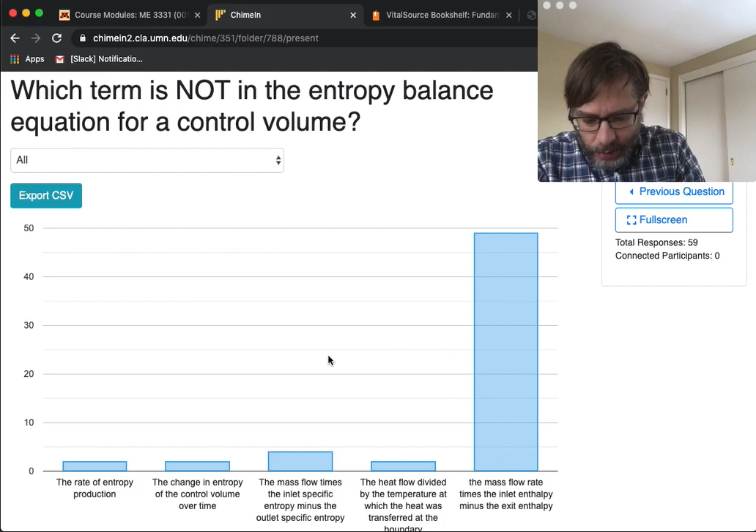Okay, all right, let's continue on to what we're doing today. Today I'm going to cover a lot of slides because a lot of the stuff we've kind of already done before, and it's not adding very much to the material.

But it'll be good review. Some of it will be a review of what we've done and how to solve problems, and some of it will be kind of not even necessary for us to go through. For your exam at least, it'll be useful for future reference.

So the property data. So last time we did stuff like that. We did the control volume, the entropy rate balance for control volume. That's as far as we're going to go for the exam. But if we wanted to calculate entropy change a little bit more in different ways, the property data that we have in the tables can yield relationships among properties that are established using what are called the TDS relations.

Now, I'm not deriving the TDS relations. I may do that in a separate lecture or something, but the TDS relations are actually quite important. They're a combination of the entropy balance and the first law balance, okay? It's like if you take the first law energy balance, that's where you get the dU and the dH here, and you put it together with the PdV term, which is like a work term, you put it together with the entropy balance, which is where the TDS comes from, you end up getting this equation.

Now these are pretty useful sometimes for solving problems. We may go through some more problems like this on Friday using the TDS relations. So I wouldn't worry about it right now, but definitely something you want to consider.

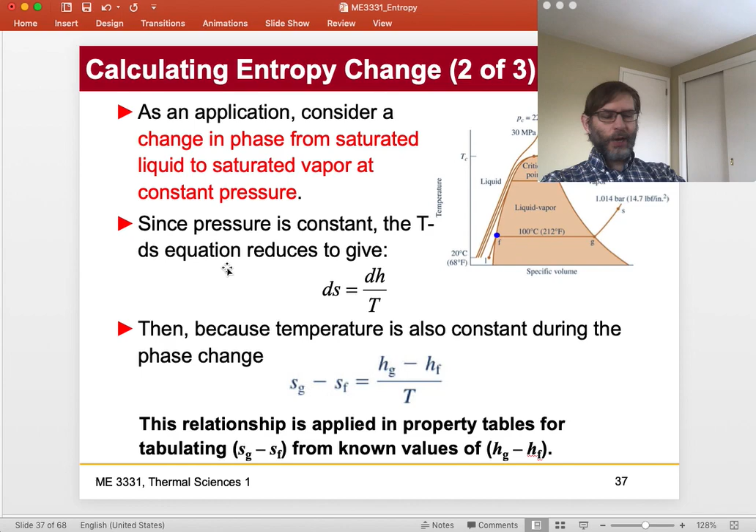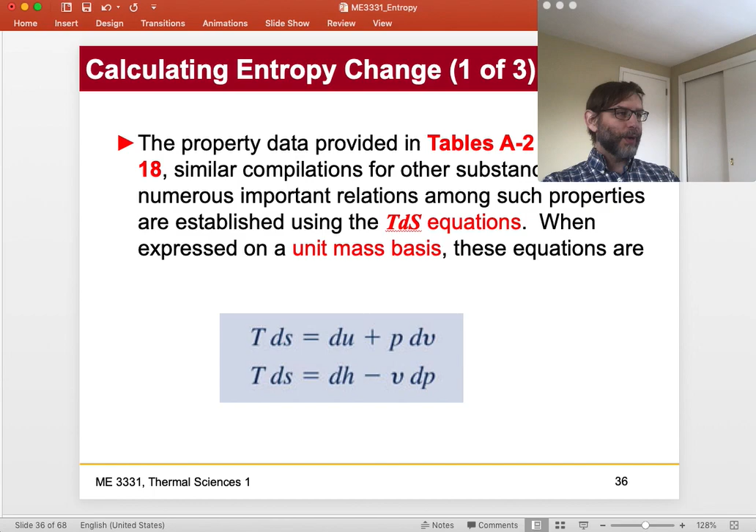So remember I said that thermodynamics is only really, excuse me, two equations. Well, the TDS equations are like taking those two equations and putting them together. Okay, that's what you're doing. It's nothing new really, it's just kind of mixing and matching those things.

Okay, so here's an example where they do this, and I'm not going to belabor this, but consider water vapor at 100 degrees C. So a lot of these slides come from the textbook, so I use them because I think they're useful and they line up really well with the book. But I don't know, sometimes I don't know exactly what's going on here.

But in this case, you can calculate the change in entropy across the vapor dome from the saturated liquid to the saturated vapor using the TDS equation. So here you go, you can find SG minus SF using the HFG value from the table, or you can just look at it in the table.

So that's why this is like silly, because you can just look at the table and find SFG. Why would you calculate it and risk calculator error? I would always look it up.

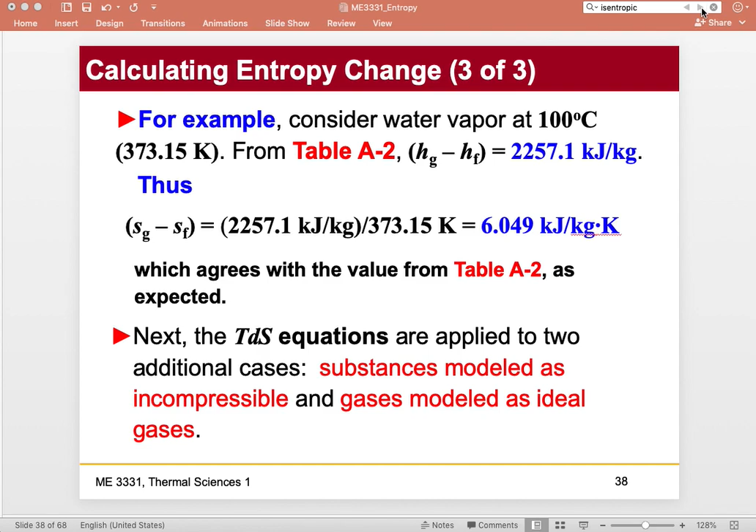All right, so let's go here. The other thing that we have to do is consider entropy change for an incompressible substance. Incompressible substances are things like liquid water, right? It doesn't compress. Gases compress, so gases are a compressible substance.

So the incompressible substance model assumes the specific volume is constant and the specific internal energy depends on temperature, U equals U of T, just like it does for an ideal gas. Thus, dU equals C as a function of T dt, where C denotes the specific heat. Right, so we use specific heat for liquids as well, as you recall.

With these relations, the TDS gives us something like the following. ds equals C dT over T, and here S2 minus S1 equals C, the natural log of T2 over T1, in which case you don't have any pressure term. Incompressible means that it's independent of pressure.

So you can see that for a liquid or an incompressible substance, the entropy change, or the entropy, is only a function of temperature. Only for liquids, not for gases, okay? I know, confusing, I know.

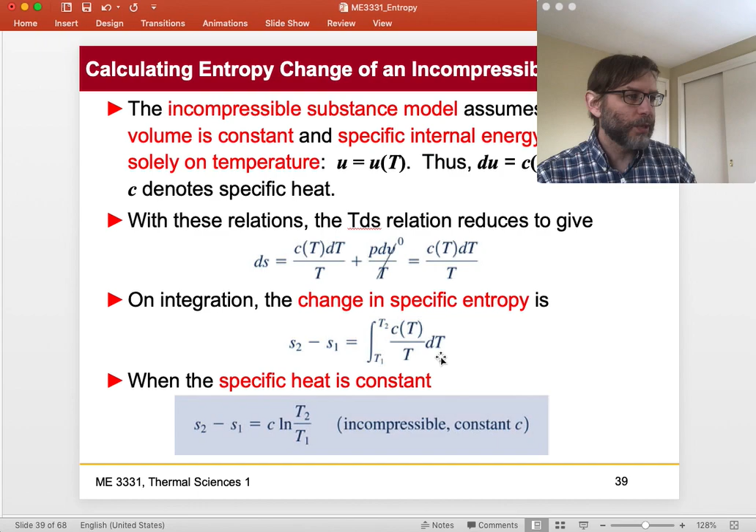But because the pressure drops out, you don't have a PdV term, you don't have any compressibility, you end up losing the dV term in the TDS equation, and you end up getting S2 minus S1 equals the specific heat times the natural log of T2 over T1. So, as I say, you look it up in the table.

So here's where we got our pressure correction term. You know how we did this S naught thing? The TDS equations are what gave us that pressure correction term. Remember the pressure correction term we've been dealing with and talking about for ideal gas? Well, it happens to come from the TDS equation.

So if you assume ideal gas with constant specific heats, you have CV as a function of temperature. Actually, not constant specific heats in this case — they're integrating, so they're assuming CV is still varying with temperature. You get the following relations. We've been using the one on the bottom right.

This S of T minus S of T, T and P is equal to the change here. This is the Q over T term, and this right here is what we call the pressure correction term. So the pressure correction term is something we have been using.

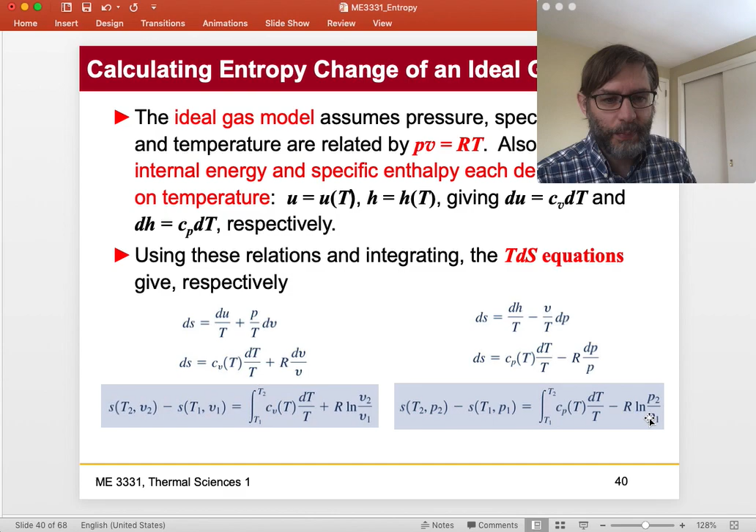Now, if I get down to this, we know, and I've already told you, that this S naught as a function of T has been already tabulated. So now, if you look at the slide, you know where S naught of T actually comes from.

S naught of T comes from the change from temperature to some reference temperature, from Cp over T dt, where T is some arbitrary reference temperature, usually taken as 0. So now you know where this comes from, right?

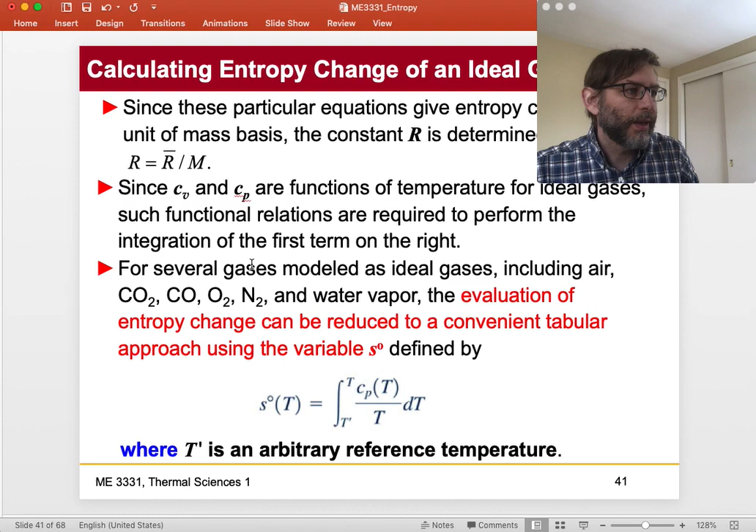So this S naught of T is actually some sort of reference temperature value, or S naught of T is this value that you can look up as a function of temperature, which you can use then in the TDS equation to get what you need.

And so there is our relation that we've been using, this one right here. Essentially, we know that the change in entropy is equal to S naught of T minus S naught of T at the other temperature, minus R natural log of P2 over P1. So that's the equation we've been using already for an ideal gas.

That's why I say it's a little bit of review. And here, we've already done this in homework too, where we use the molar specific version of this, where S bar, delta S bar, essentially, we use S bar naught. And you can see in the tables, you can find these values for different gases, A22, A23, A24, etc.

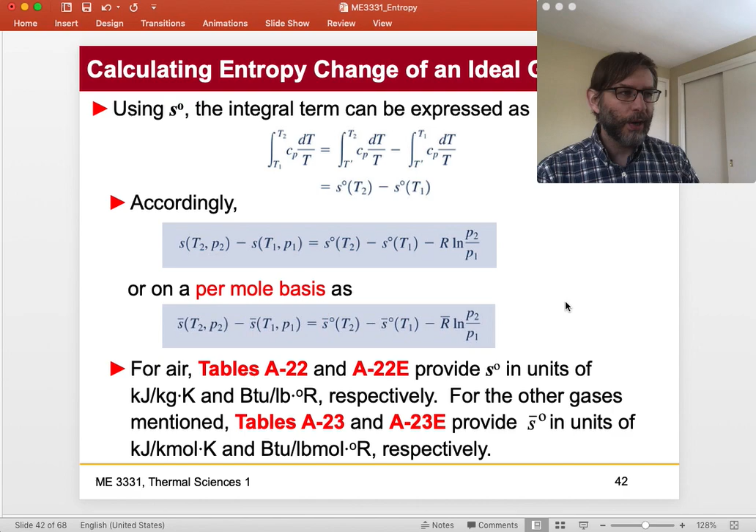Okay, so this is where you're finding these change in entropy values that we've been calculating, and now you know where it comes from — it comes from the TDS equations. So the TDS equations are kind of important. We use them, but we don't really think about them very much. We just sort of use them for finding things.

The change in... we've already done something like this, so you can look at this yourself. Essentially, we get S naught 1 and S naught 2 from the tables, which we've done before, and calculate this. So you can go through these yourself and do some practice problems. I suggest that before the exam.

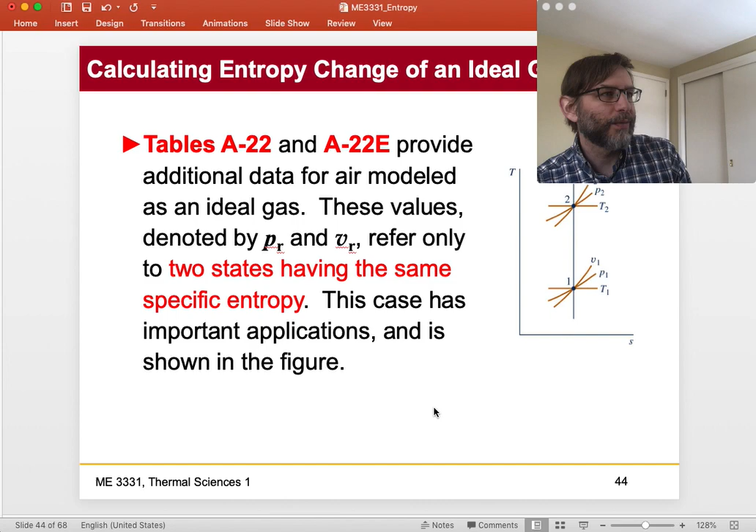Okay, so let's think. Calculating entropy change of an ideal gas, tables A22. These are reference pressure and volume. All right, we're skipping this one, we're skipping 44. I'm just going to note here that we're skipping these because we don't need to pay attention to that right now.

The other thing we can do is if we have constant specific heats, we can pull the specific heat value out of the TDS equations, out of the integral, like they're doing here and here. You're pulling them out of the integral, and essentially now for an ideal gas with constant specific heats, you've got a very simple equation to solve: Cv ln T2 over T1 plus R ln V2 over V1, or the other way around.

Okay, here's something that's just really important to know. These two equations can be used interchangeably. There's not a specific situation when you need to use one or the other. They're equivalent to each other. You just have to know which thing you have in your problem in order to solve.

For example, if you have a problem that has changing volume, you'd use the left one. If you have a problem that has changing pressure, you'd use the right one. And so this is the most important thing. In this case, the one on the left, the Cv one, this would be if you have like a piston cylinder thing, you have V2 over V1. And the right one would be, say, if you had a constant pressure process, you'd have the changing pressure. But it doesn't matter, you can use them interchangeably.

They don't apply to specific things, they're based on thermodynamic properties. The only thing you need to make sure you understand is that these equations are only to be used for ideal gases with constant specific heat. Don't start using these for steam, I'm gonna freak out, so don't do that. These are for ideal gases assuming constant specific heat.

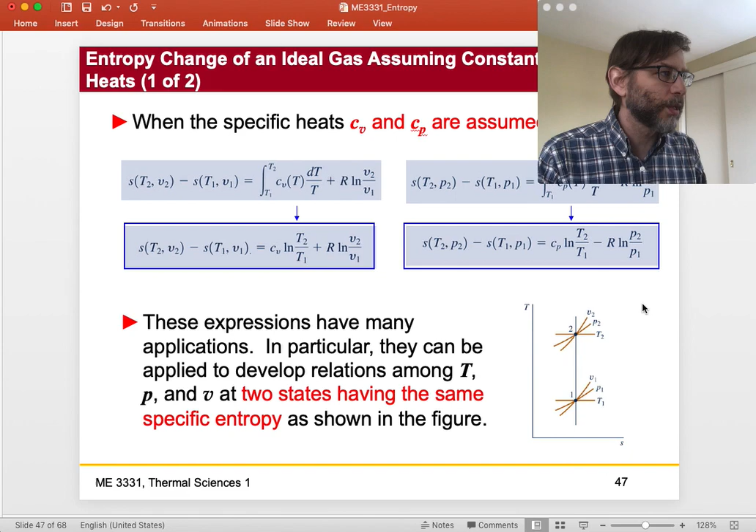Okay, so there's some helpful relations that you could use. Now if we go here, we can derive a couple of really important relations, and I'm going to use these in an example for us. And they go kind of like this, so let me move here.

So in the case of what we call an isentropic process... change in ideal gas assuming constant specific heat. I'm modifying the slides right now, I'll repost these. An isentropic process has S1 equals S2, and it has adiabatic, Q equals 0. Right, adiabatic. Okay, that's the definition of an isentropic process. Let's just do that like that, okay?

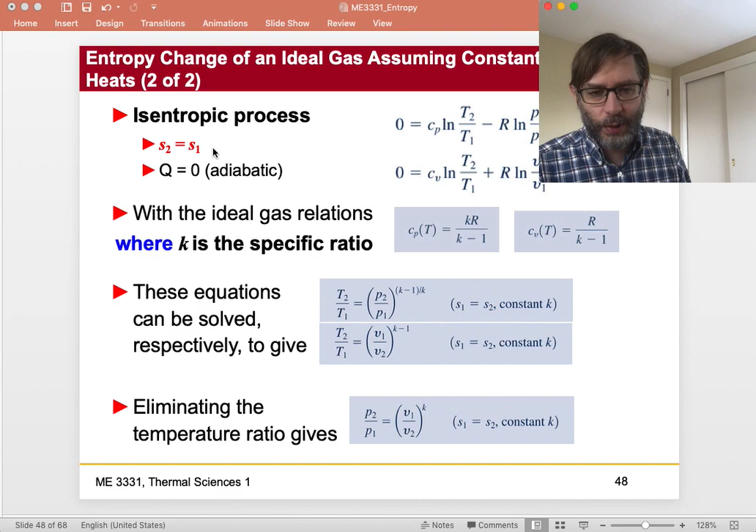Good, isentropic process defined. All right, so now we've talked about this before. We've talked about adiabatic before, that's where Q equals 0 for a process. For a process where S2 equals S1, that's called a reversible process. It's one where S2 equals S1 and the sigma is 0, and there's no heat transfer. That means that term of the equation goes away, and then what you're ending up with are the TDS equations that look like these.

0 equals... and for constant specific heats, if we want to assume that, for an ideal gas, we have the same relations I just discussed earlier. And then you can use these relations, Cp as a function of T equals kR over k minus 1. When they do this, by the way, this doesn't mean Cp times T, this means Cp at that temperature, okay, be careful, that's not Cp times T. So it's kR over k minus 1, which I've given you these relations before: Cv equals R over k minus 1, and Cp equals kR over k minus 1. These are relations we should have learned in Chapter 3, but I did a bad job and kind of forgot to go through all those, so I did a little bit of interspersed talking about these and how they're derived.

Assume these are for an ideal gas at constant temperature or constant specific heat. If you combine these sets of equations, you can get new equations. You can see how this was working out. Essentially, you take the exponent to each side and relate these R's and K's.

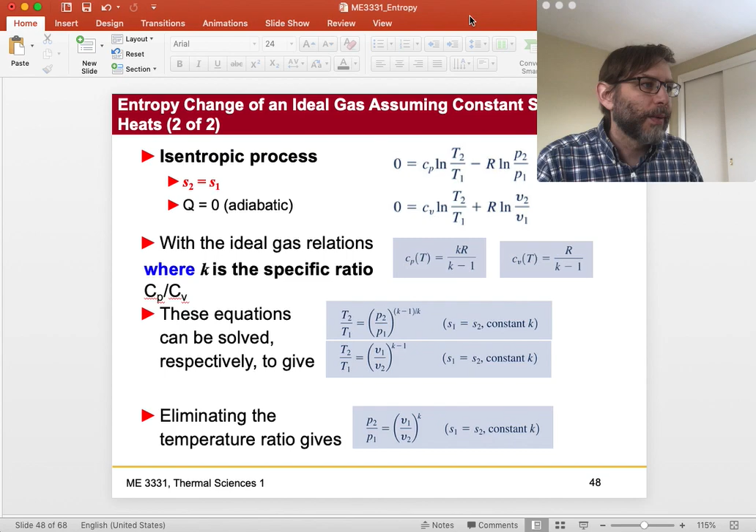Remember, K is the ratio of specific heats, where K equals Cp over Cv. Do you remember this? We talked a little bit about the same kinds of equations we use for a polytropic process, but now we're using them for an isentropic process.

It turns out they are the same equations, just replacing k for n and k. When you solve these isentropic relations, k is the specific ratio, Cp over Cv, and the equations, when solved, give these, which are called the isentropic relations. So T2 over T1 equals P2 over P1 to the k minus 1 over k. These are hugely important and very easy to use equations for the case where we have ideal gas, constant specific heat, and reversible process. You can use them for an isentropic throttling process, a compression and expansion process, the turbine, compressor, all sorts of things.

If we assume isentropic and we assume constant specific heat and ideal gas, that's a lot of assumptions, but we often make those kinds of assumptions when doing problems. So you can get this set of relations which are actually really useful.

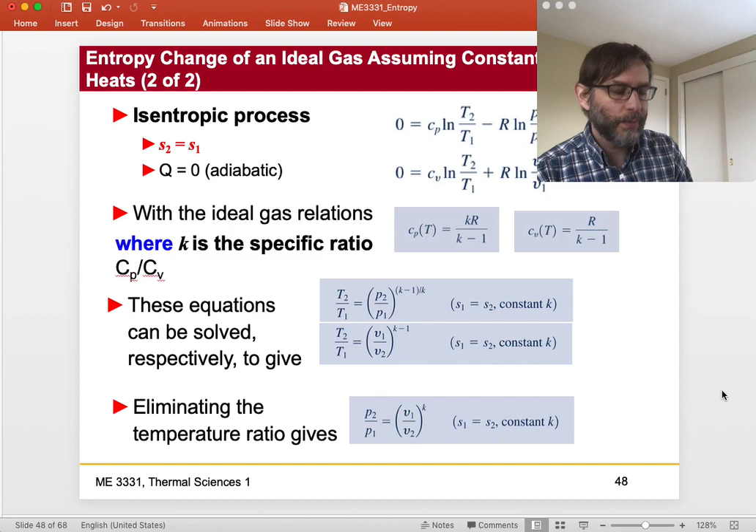Oh, this is using the PR. I'm not going to do this. But I am going to do this, so you can look through this example.

This example essentially tells you to calculate the final temperature using two different methods: one using the tables, where you can use the PR method, which I just didn't go over, or you can use the constant specific heat value. In this case, you can calculate the temperature T2 using this relation here between those two states. If you look it up directly in the table, you get the change in temperature as a function of changing specific heats, whereas the second method does not assume changing.

So this one's T2, the more accurate method, is 339.7, and this one's T2 is 345.5. That's really not going to make a big difference, but certainly maybe one would be more accurate than the other. I don't really care. I kind of think constant specific heats is a fine assumption, and in combustion we do it all the time. So it's kind of neither here nor there.

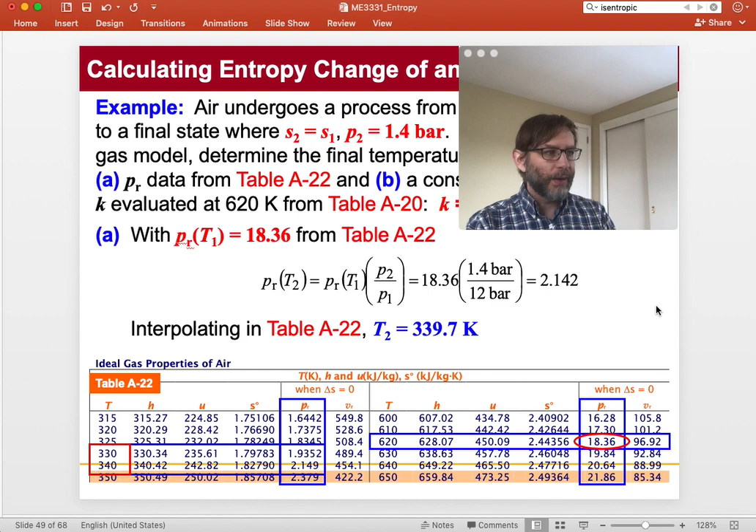I think probably the method using the tables, which I haven't really told you about here, is more accurate. But most of the time we're going to assume constant specific heats. Okay, so let's do a couple problems. I'm going to use the ideal gas model with constant specific heats to solve one of them, and the other one is actually a steam problem.

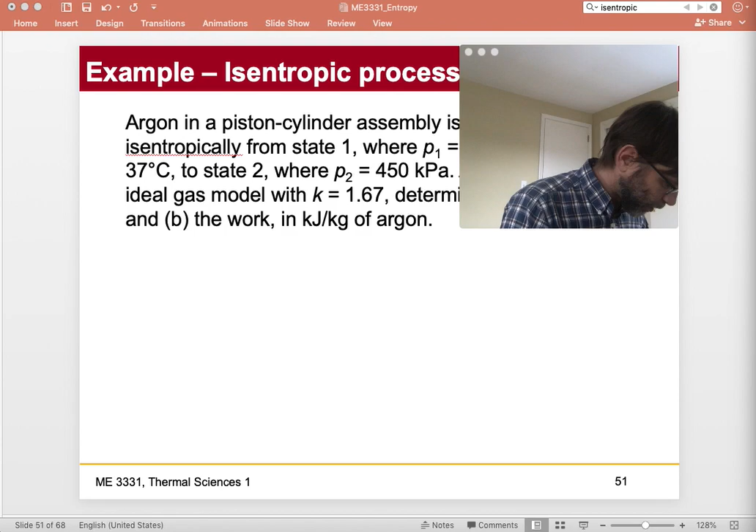Let's see, which one am I going to do first? I'm going to do the argon one first. The first one we're going to do is argon in an isentropic process. So let me get my tablet out here and do some work.

Okay, here we go. Example problem 1: we have argon in a piston cylinder assembly compressed isentropically from state 1 to state 2. State 1 and state 2 are given here, and K is given.

When a problem says K equals something, that means they're assuming constant specific heats. So that's a constant K, constant specific heats, because K is equal to the ratio of specific heats. All right, so what we're going to do is solve this thing.

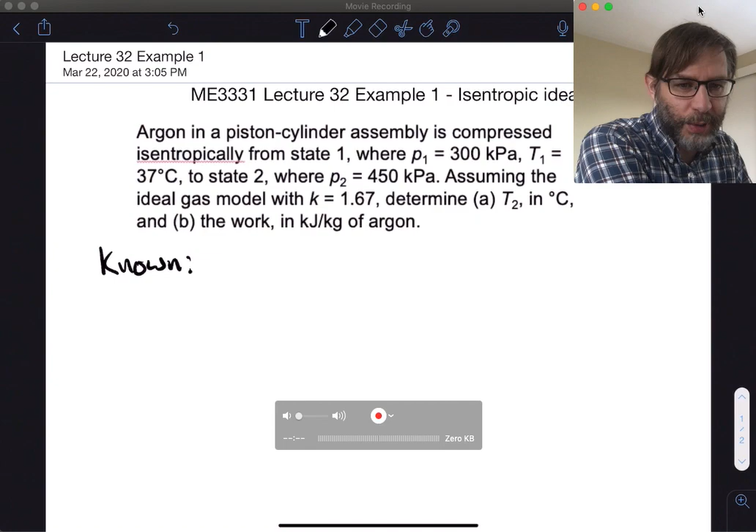Known. By the way, I want you to use these methods that we've been doing with these example problems over and over again for your exam. I want to see this procedure laid out. I know people think it's annoying and obvious and all this stuff, but just humor me. Put them in there, and you'll get all the points, and then I'll be happy.

Okay, so known: we have a piston cylinder. So we're back to pistons and cylinders again. Compression with an ideal gas.

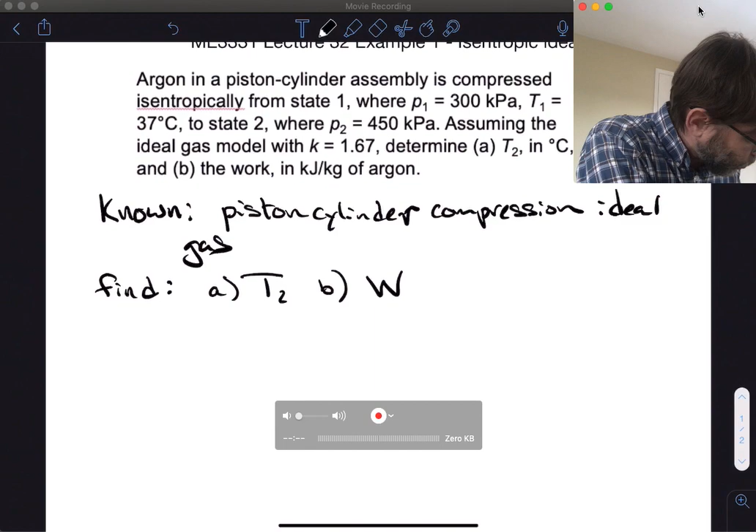What we're going to find here is... hopefully you can read that. Oh, you can read that, right? I hope my handwriting isn't totally degrading here. So find A, we're going to find T2, the second temperature, and B, we're going to find the work in kilojoules - little w in kilojoules per kilogram of argon.

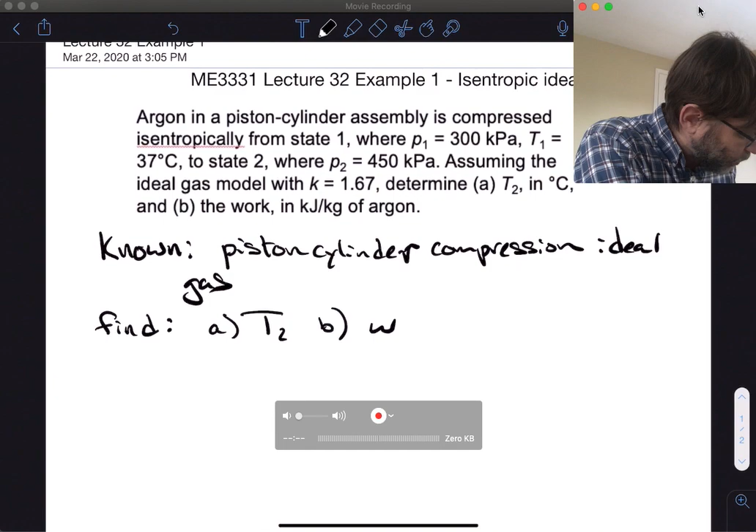Ideal gas, which is argon. So we don't need to know much to solve this, but let's just make some assumptions, and the assumptions will make this thing very easy to solve. Essentially, we have argon so it's a closed system, which we'll draw here in a minute. Second, we're going to assume this is an isentropic process.

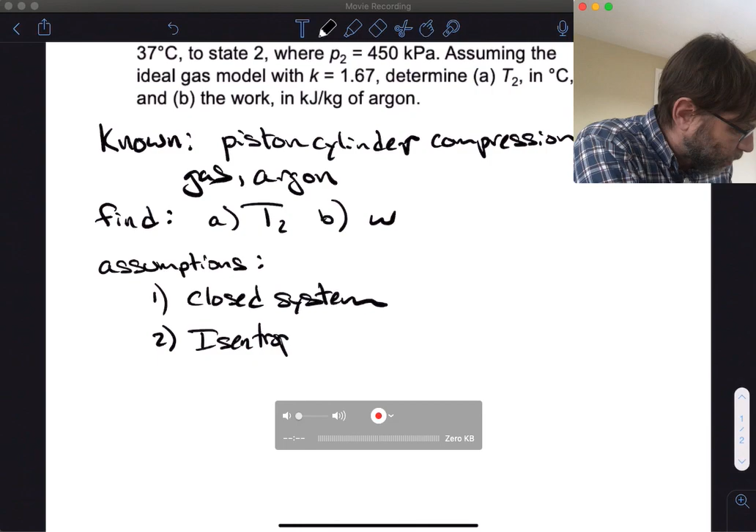It doesn't really say that, does it? Isentropically, of course it does.

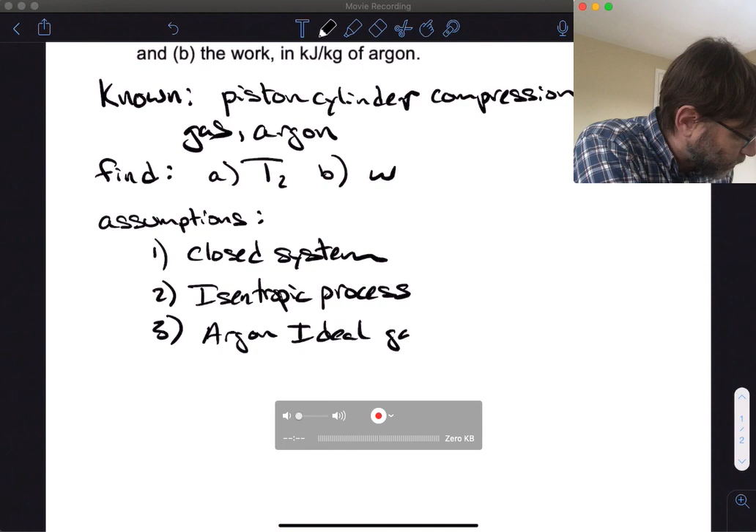Okay, number 3: argon is an ideal gas with K equals 1.67. It's interesting, argon. It reminds me of something a colleague at University of California, Berkeley is doing with argon in an engine.

Remind me when I get to the engine cycles. Well, hopefully you can remind me, but I'll try to remind myself that when we get to the engine cycles, I'm going to discuss the idea of using argon as a working fluid in an engine, okay? Let me just make a mental note there. Right now I'm not going to do that, I'm just going to get this problem done.

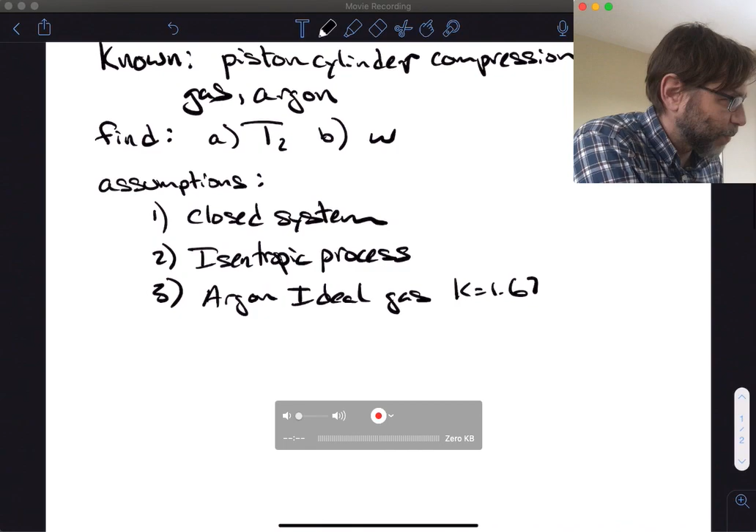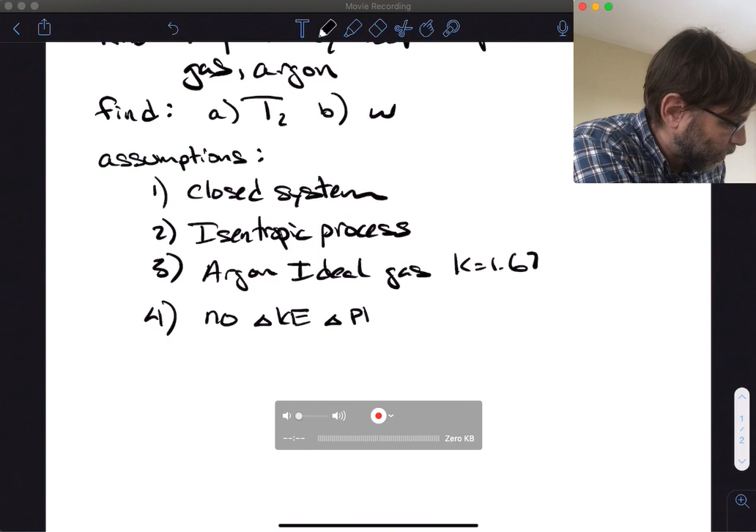4, we're going to assume no delta KE and no delta PE. So we assume no kinetic or potential energy effects. And now let's make our diagram.

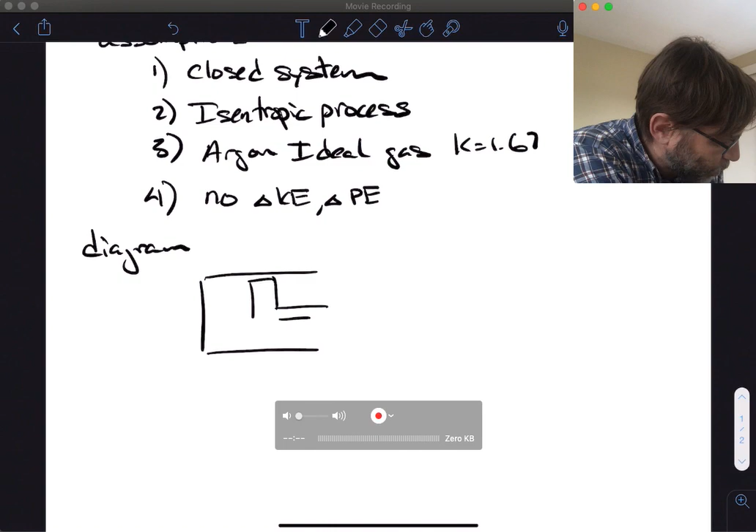So our diagram looks like the following. We always have to make our diagram. You can be pretty much rest assured that there's going to be some kind of piston cylinder type deal on the exam, because I do so many of them that it would be silly for me not to put something like that on the exam. It might be a little trickier than what you've been seeing, but it's going to be a piston cylinder.

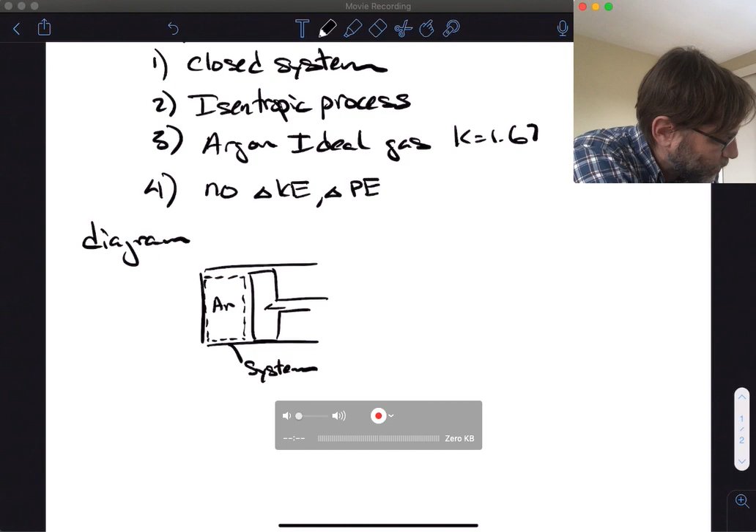So this is the system, which we've labeled with our dotted line. We know you have argon in here, you have a piston, and it's a compression process. So we have work - they want us to find little w, so I'll put that in there. We're going to say it's insulated, so I put insulation around the outside of it. So there's no Q.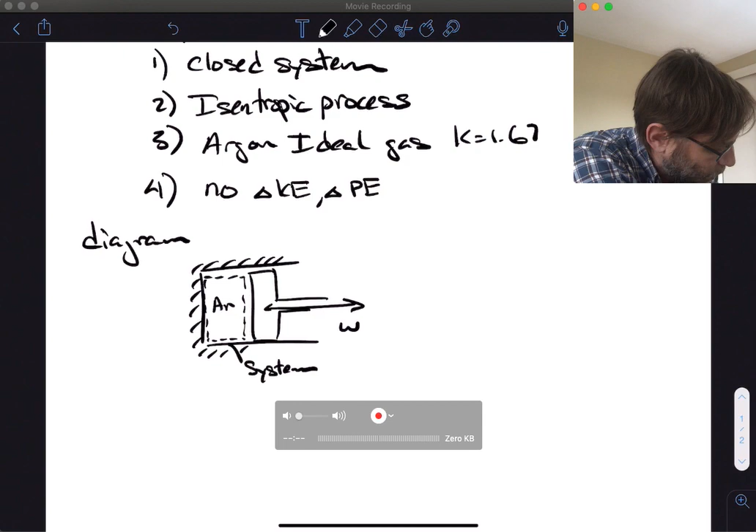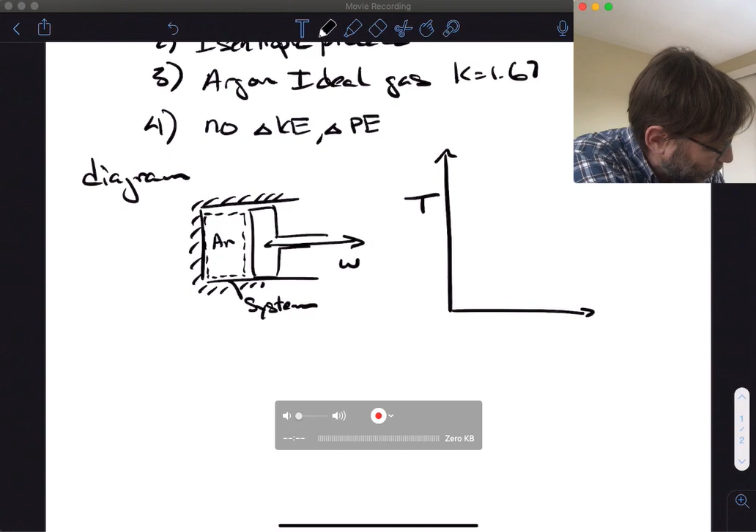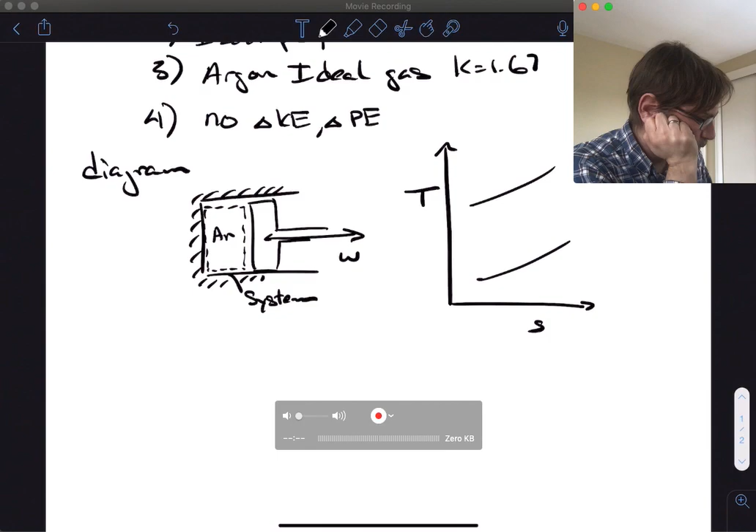And then we also have, in this case, we can make a TS diagram because we know what everything is. So P1 equals 300 and P2 equals 450. So 450 is up here, and 300 is down here. So this is 450, this is 300 kPa.

And you have an isentropic process, which means that S2 equals S1, isentropic - remember we said that? So this is straight up. So we're compressing to a higher pressure, so we're going like this. So this is state 1 and state 2.

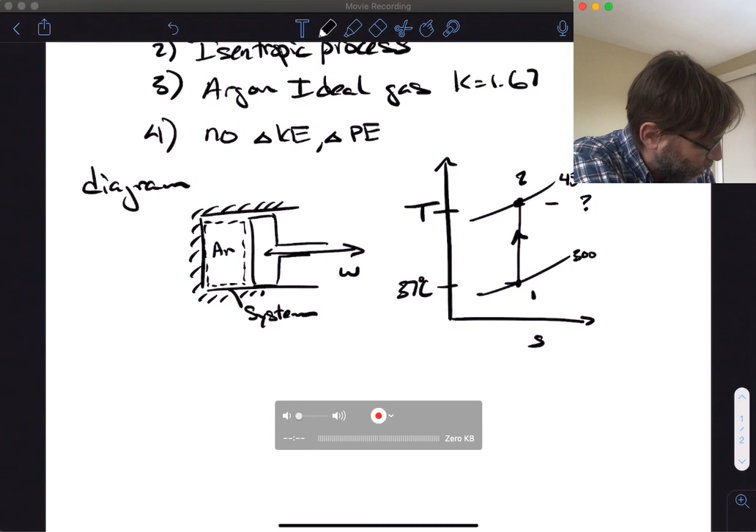Okay, anything else? We don't know T2, so we don't know this one. But we do know this one is 37 degrees C. So T2 is not known - that's what we're going to find. Oh, but it's so easy, right?

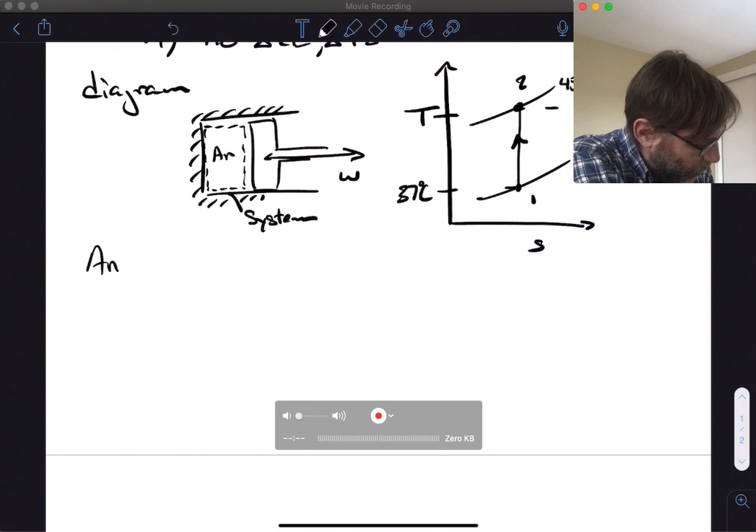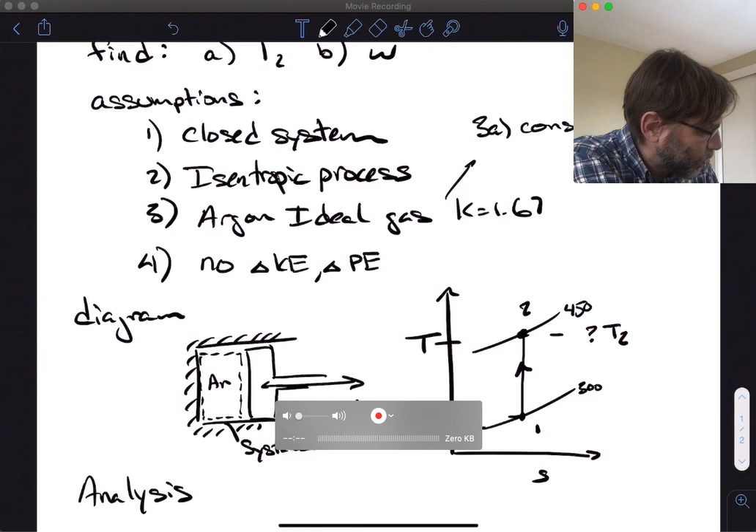So with those relations we just came up with, since we have constant specific heats with constant ideal gas, this assumes - we'll just call it 3A - that it's constant specific heat, constant CV. Because they give us a K, we assume automatically that it's constant CV.

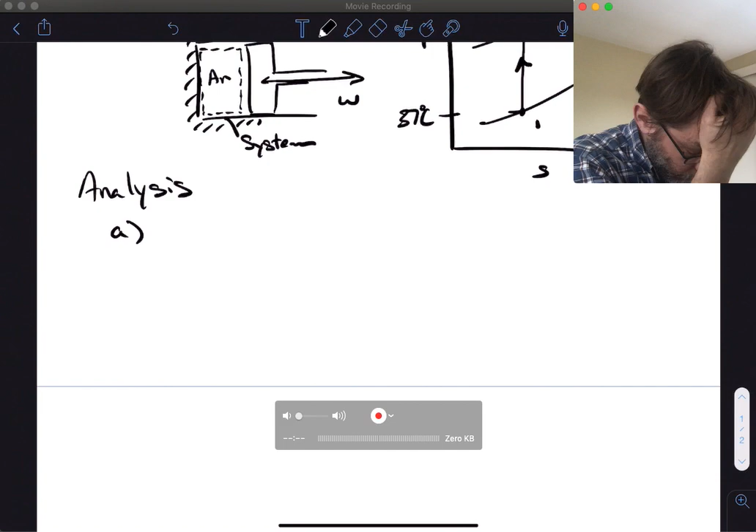Okay, so now let's go. A is to find the temperature. We're going to use our new relations that we just came up with, which are called the isentropic equations. So we're going to use T2 over T1 is equal to P2 over P1 to the K minus 1 over K. How easy is that?

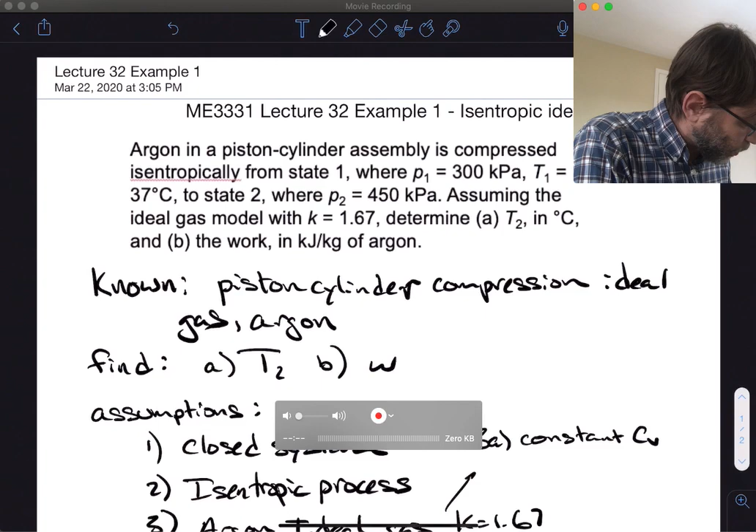So T2 then is equal to T1, which is 310K, times 450 over... is it 150? What's going on here? It's 300. I said 300. P1 is 300, and T2... okay, so my solutions are different - 300 or 450.

Oh man, so I'm gonna have to check the solution here. Bear with me. So k minus 1 over k is 0.67 over 1.67.

All right, let me get my handy phone out. I got a new phone, but the calculator is still just as bad as the other one. Let's see, calculator - oh, does it let me do scientific? Oh yes, okay good. So 450 divided by 300 equals, to the... where is it here? X to the y. You can't see what I'm doing here, unfortunately. I'm sorry.

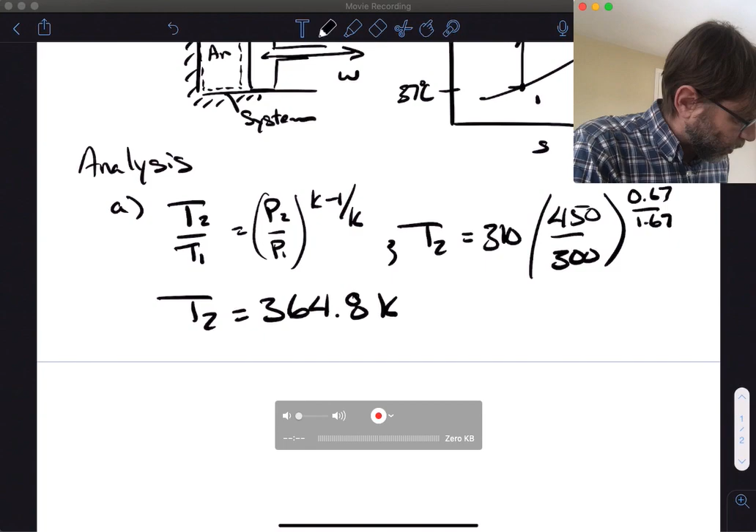0.67 divided by 1.67, close, equals... times 310, I get 364.8. So T2 equals 364.8, which is wrong compared to the solution I have, so it's good that we're doing this.

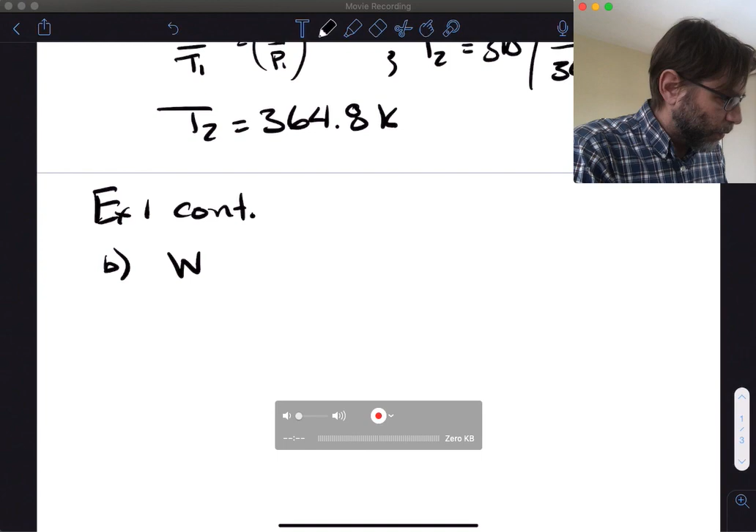So example 1 continued, part B. Now we have to find the work. The work is based on the first law energy balance, right? Because there's no work in the second law balance. We're going to have work. So Q minus work equals U2 minus U1, neglecting kinetic and potential energy, which we assume go to zero.

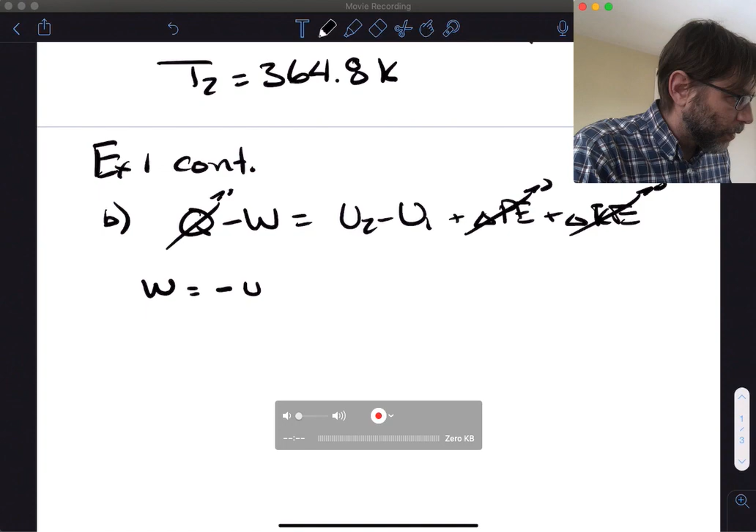So work, let's put it in terms of mass. So work is equal to negative, U2 minus U1, which equals CV times T2 minus T1, since we're assuming constant specific heats.

And then we could look up CV in the table, or we could use the relation that CV equals R over K minus 1. Now remember, this is not R bar, that's R. So it's 8.314 divided by the molecular weight of argon, which is 40, I think.

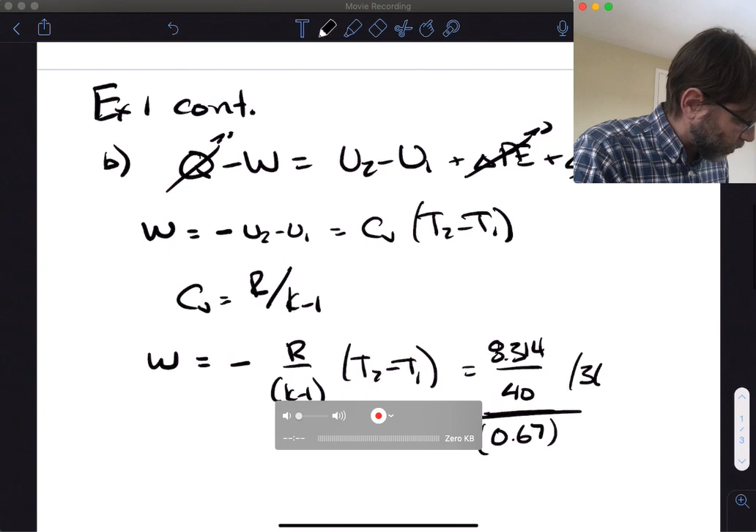Okay, anyway, so here we go. Work is equal to negative R over K minus 1 times T2 minus T1. This is 8.314 divided by 40, divided by 0.67, the whole thing, times 364 minus the other temperature, 310.

Okay, let me just do this real quick on my calculator. 8.314 divided by 40 equals, divided by 0.67, which is equal to 0.310 times 54.8 is equal to negative 17, essentially negative 17 kilojoules per kilogram. So that's what you got, negative 17 kilojoules per kilogram, pretty much on the dot.

Which means it's work going in, so negative means work into the system. If it was positive work, it meant that we were getting work out by compressing, which of course you know we can't do. Okay, good.

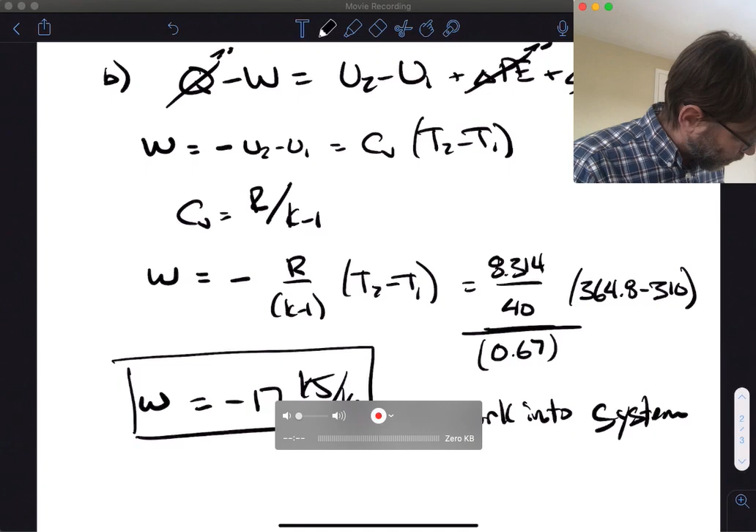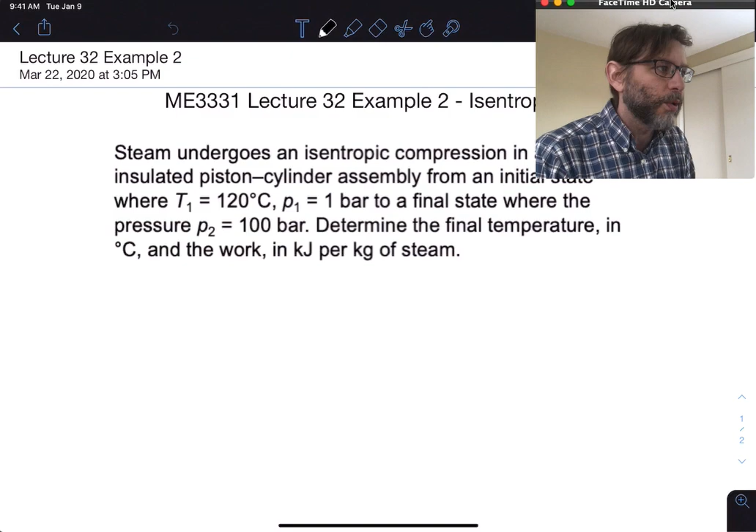So let's do the other problem to finish us off here. This one is steam undergoing an isentropic compression, in a piston cylinder. Same problem, just with steam. From T1 120 and some pressure to a final state, we don't know the final temperature and we don't know the work, so we're just going to essentially ditto what we did before.

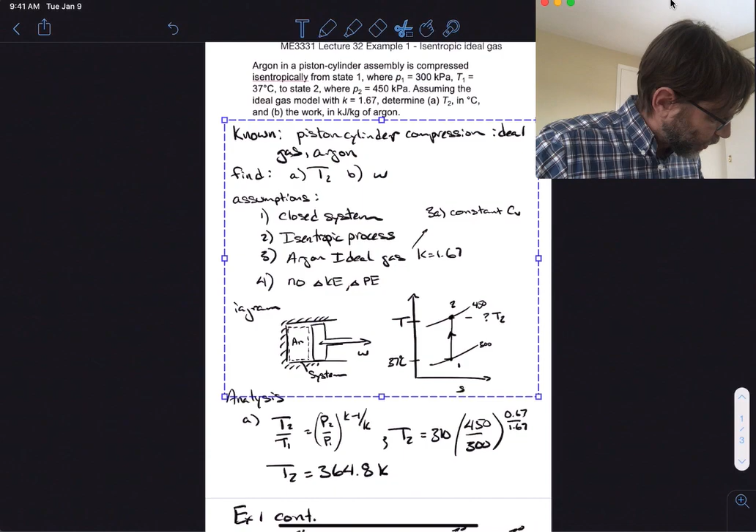I wonder if I can do that. Hold on, let's ditto this and copy it and see what happens. Let's just select all this stuff to make my life easier and pull this out. Oh, they're not gonna let me copy it. I've not done this before, so I'm a little tentative. No, not gonna let me do it. All right, I'm gonna do it again. Let me be lazy. I'm trying to be lazy, but okay, I don't let you guys be lazy, so why should I be lazy, right?

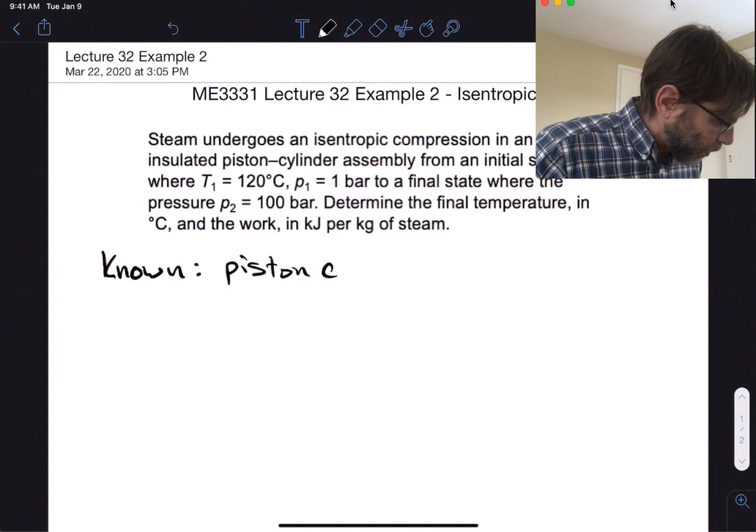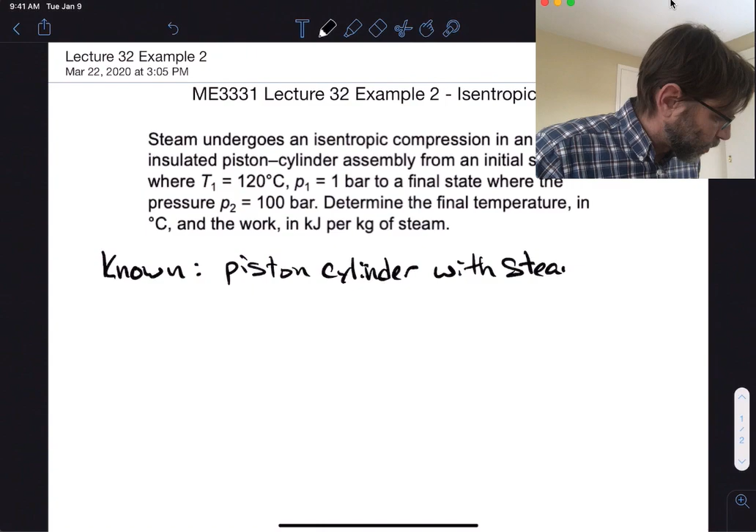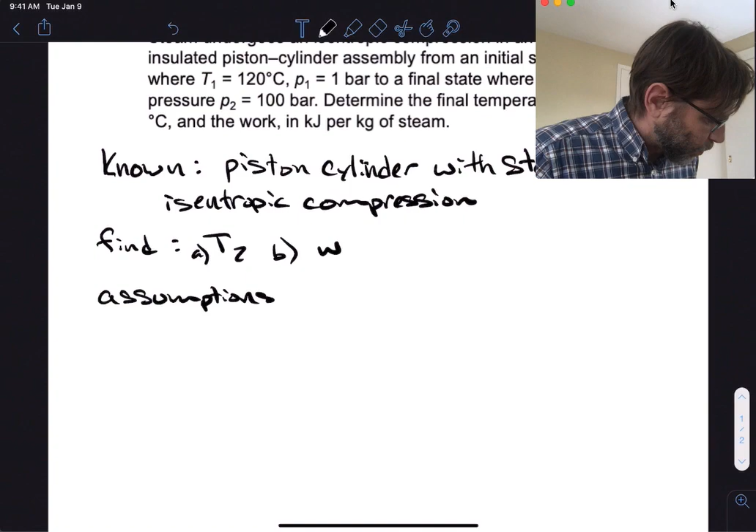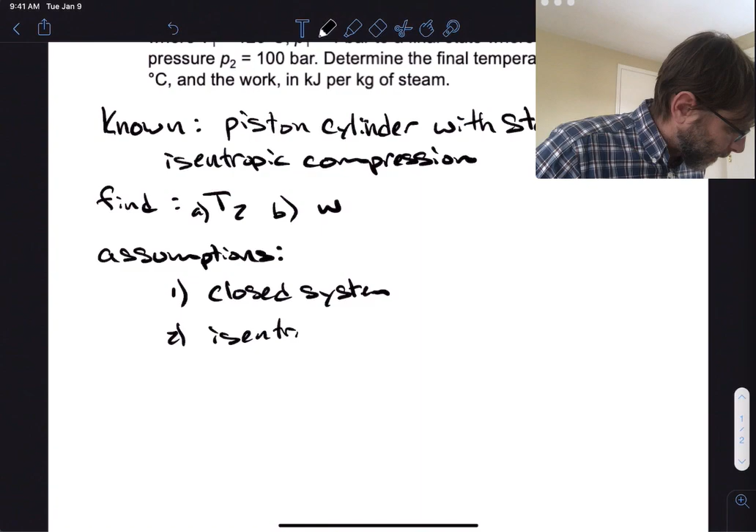So known, we have a piston cylinder with steam undergoing an isentropic compression. We need to find T2, parts A and B, and the work per kilogram, little w. The assumptions, similar to last time, we're not going to assume ideal gas here. We're going to assume a closed system and isentropic process, so S2 equals S1 and Q equals 0. We're also going to neglect kinetic and potential energy.

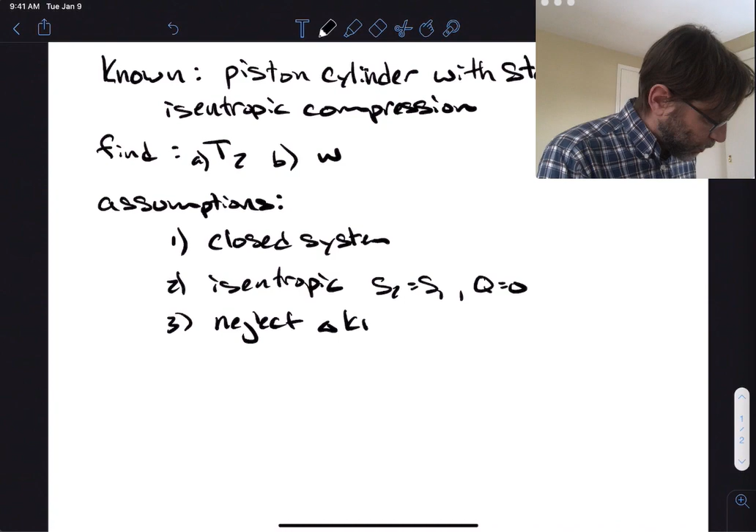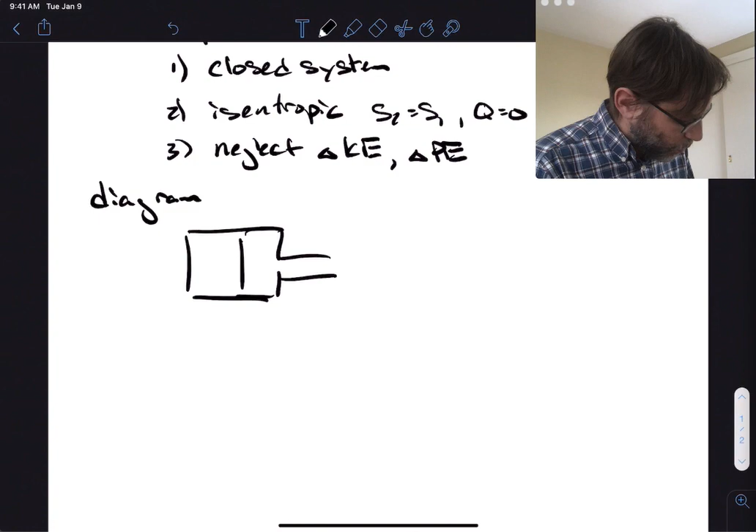My diagram is going to look identical to the last one. It's an adiabatic piston cylinder arrangement where you have some work, and a system, but here we're going to have water instead. It's insulated. This is our system.

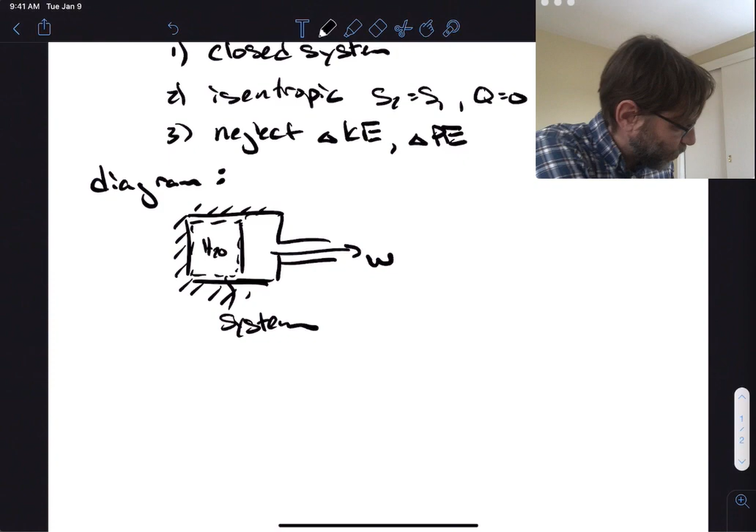Okay, so I guess it's a little different in that we have the vapor dome in this case. One thing though, we might even be talking about superheated stuff. So let's see here, 120 and 1 bar.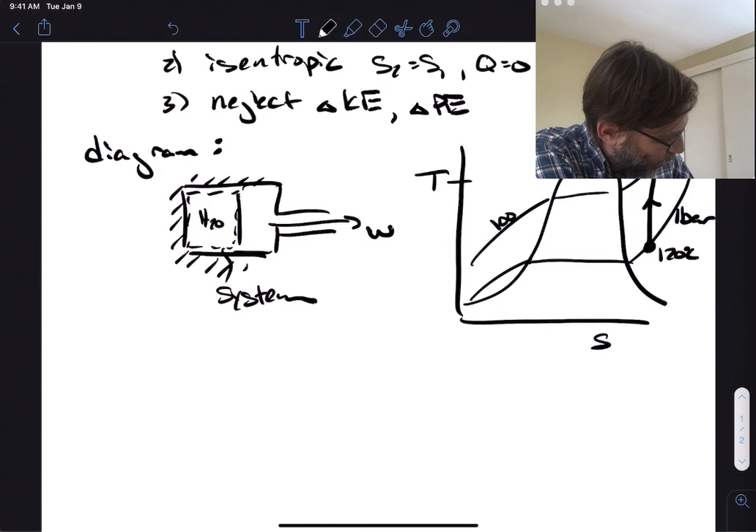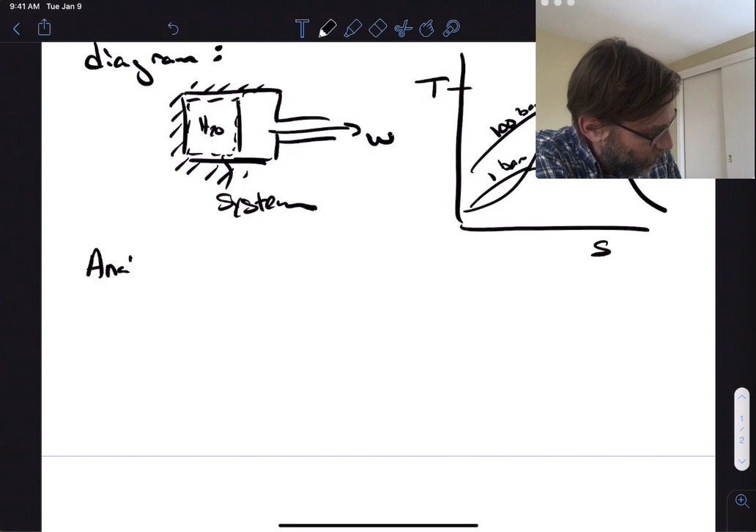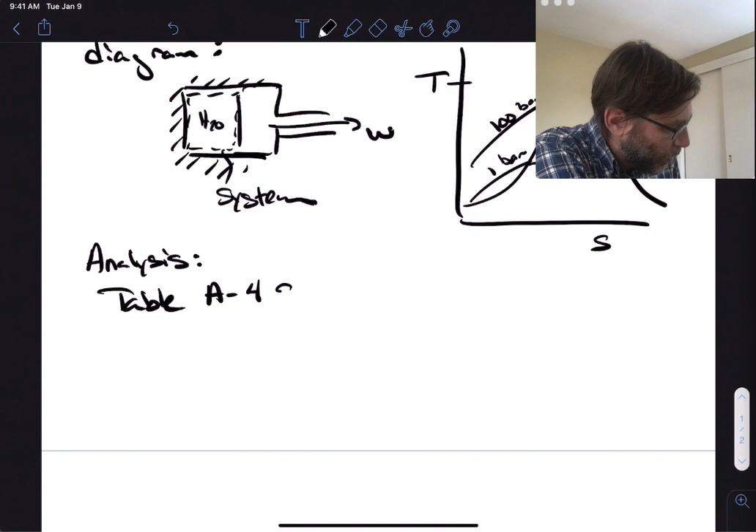Now let's do our assumption, our analysis. So we know that S2 equals S1. On table A4, we know it's superheated. We know condition 1: T1 equals 120 degrees C, and S1 equals 7.4668 kilojoules per kilogram-Kelvin. We also have to know U1, which equals 2537.3 kilojoules per kilogram. We need U because we have a closed system - H isn't going to do us very good in this case. So we need to look it up on table A4.

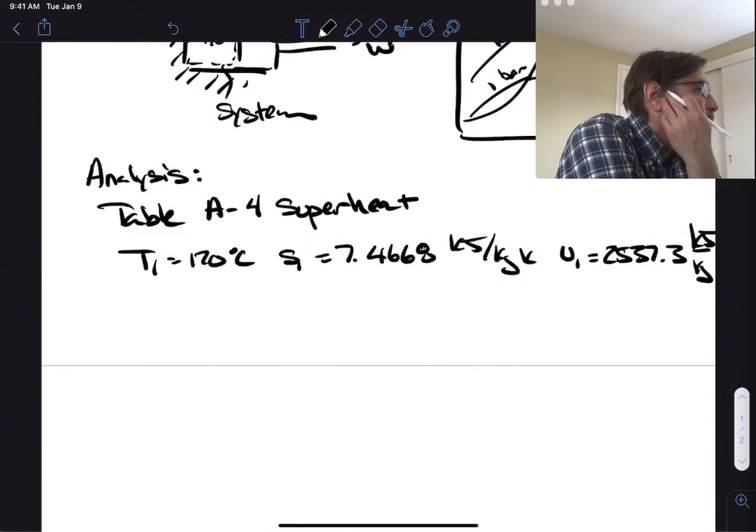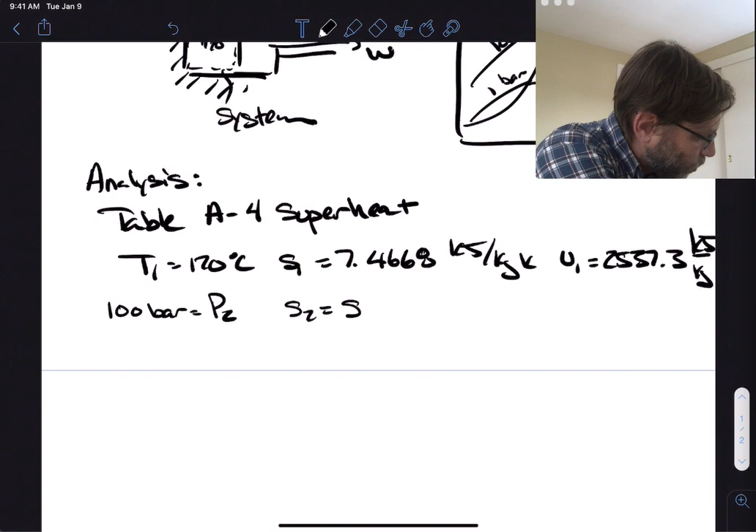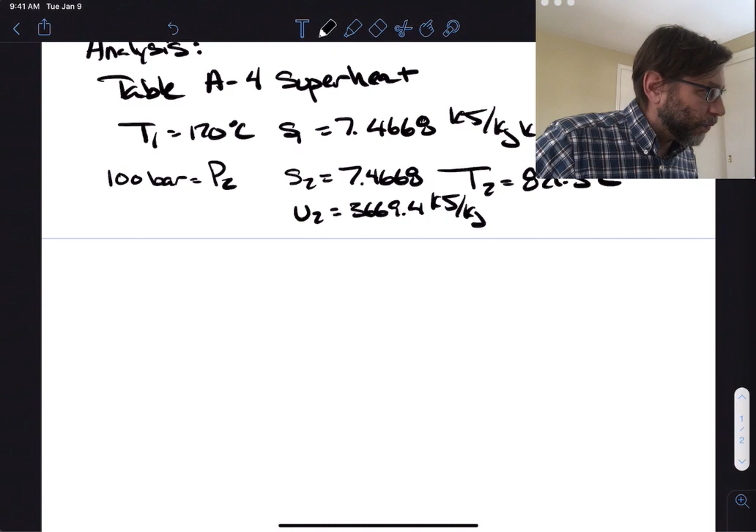In this case you have to extrapolate - I was just looking at the problem solution. So if you go to 120, you have to find a temperature at 100 bar, P2. I'd never make you extrapolate, that would be silly. But if you were to find these values in the table, you'd look straight up in the 100 bar superheated table, and you'd find that S2 is equal to the same thing, 7.4668. We know U2 equals that, and by looking at the table, T2 is equal to 821.3 degrees C - you'd find that by interpolating. We also know little u2 is equal to 3669.4 kilojoules per kilogram.

So that's just looking at the tables and interpolating. We can obtain T2 - that's already found, we found this in the table, so that's the first answer.

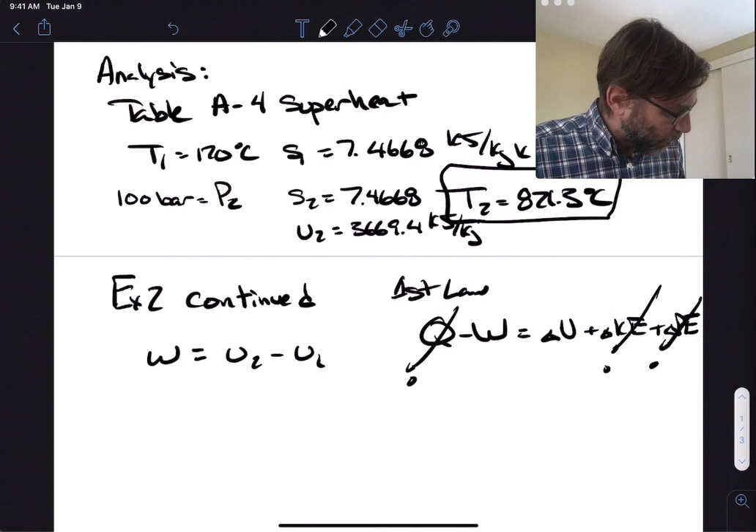Now we can find the work. Little work is equal to U2 minus U1, because if we do the first law, we have Q minus W equals delta U plus delta KE plus delta PE, where these go to zero because we said those are zero, and we said this was zero. So negative work equals U2 minus U1 - remember that from the last problem? Essentially we don't need to know anything about mass because we're calculating this normalized per mass.

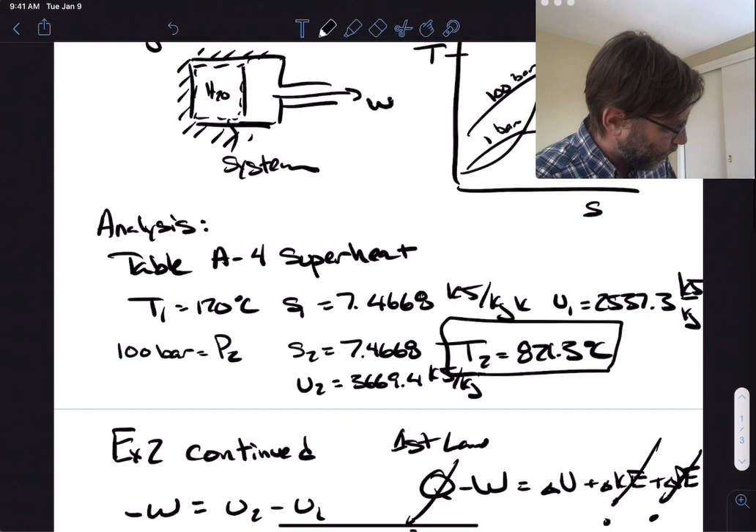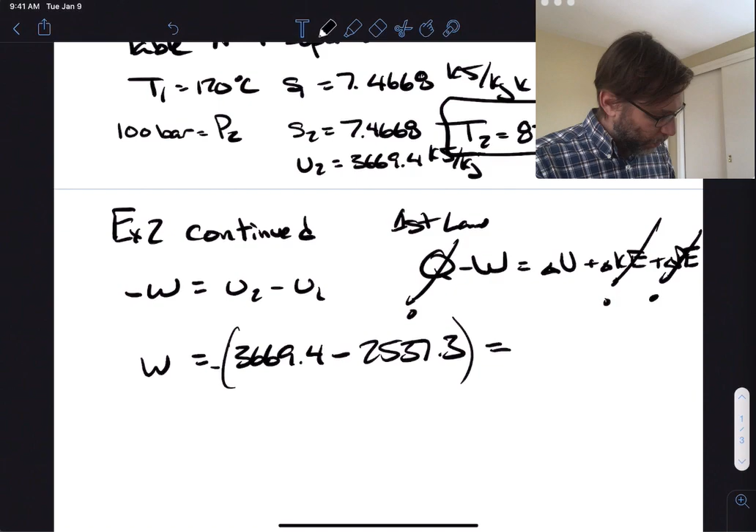So work is equal to 3669.4 minus 2557.3, and is equal to negative 1132 kilojoules per kilogram of steam.

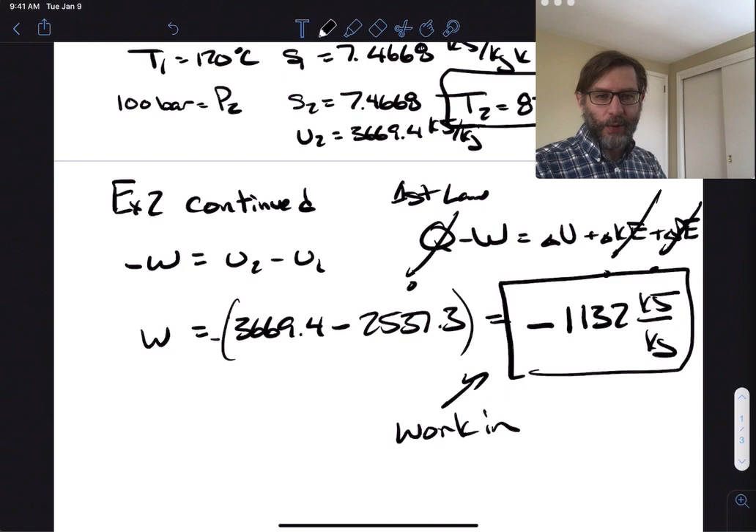Again, it's work in - it's always nice to indicate that, whether you have work in or out, interpreting your result. I like interpreting results, so if you say this is negative, it must mean the work is going into the system. Whereas if Q is positive, you'd say that's heat going into the system.

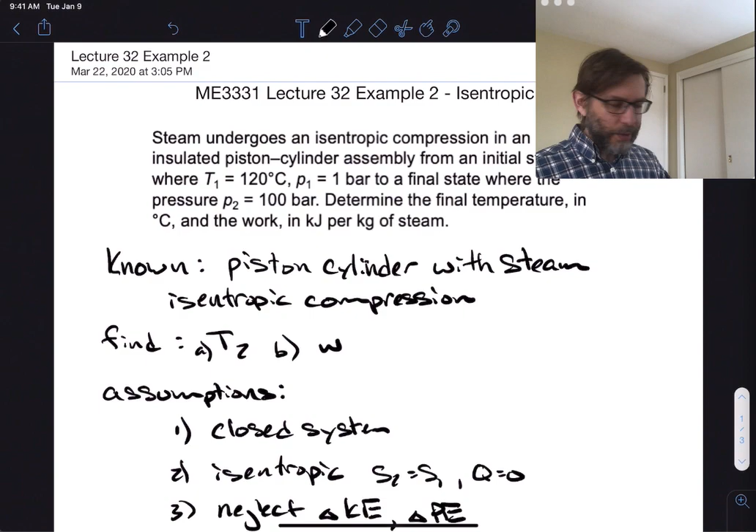I think that does it. So these are just a couple examples of isentropic processes. We can make them harder than this, but this was just a real easy way to get you accustomed to using these isentropic process rules. So as I said, if we're dealing with steam, use the tables. For an ideal gas, when we're given a K and a constant specific heat, you just essentially use these isentropic relations.